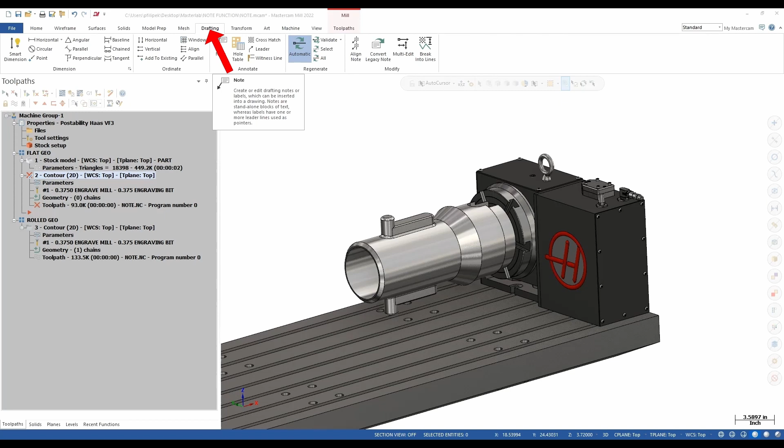Up in the drafting menu in Mastercam we have the note option. If I go into the note option, I have the ability to type in whatever I want here for letters. In this case I'm just going to type in part number 1. This works just like our wireframe create letters option, with the same sort of clicks.

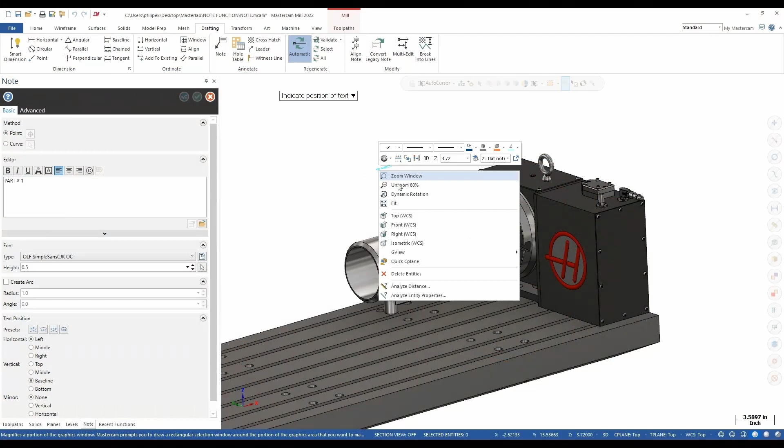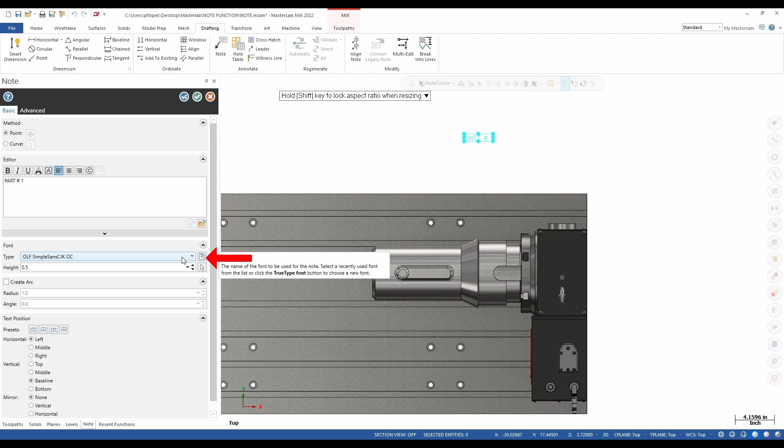If I go ahead and just put part 1 out into space, this will give me the ability to make it easy to select later down the road. In our note dialog box we have a bunch of options as far as bolding, italics, underlines, and a lot of different font sizes that you're used to. You can change the height to whatever height you want the letters to be, and you do have presets at the bottom as far as horizontal, vertical, or mirror.

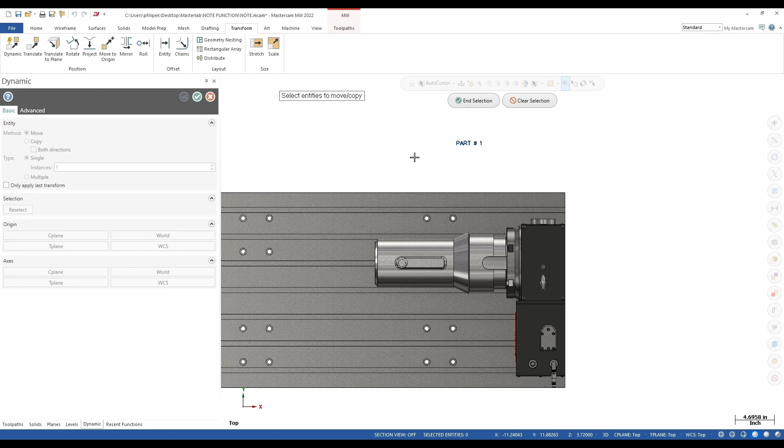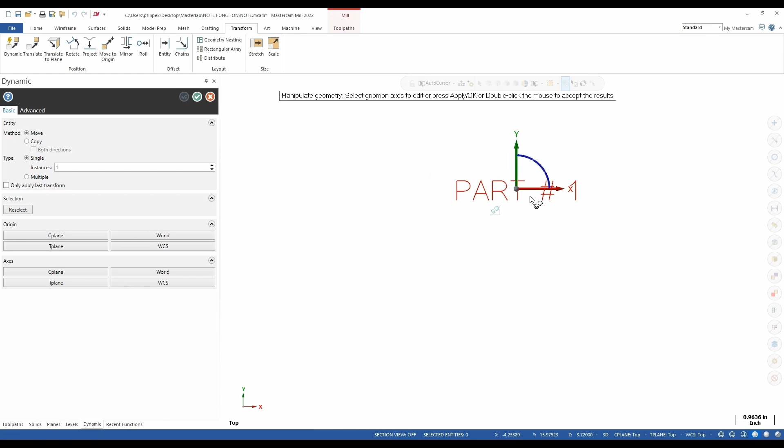So I placed my letters out into space here, and I'm going to go ahead and green check. I'm now going to use our transform dynamic option that we're all used to. I'm going to go ahead and window my whole note and end selection. One nice thing that we did keep here is we do have our blue and white temporary midpoint that we can use inside of Mastercam. So I'm going to go ahead and anchor up on the blue and white dot on my note and anchor it there.

I can now drag this to my position on my part, and now I can use quick points to align this to the center of my feature. I'm going to go ahead and green check there. Now my letters are placed on the part.

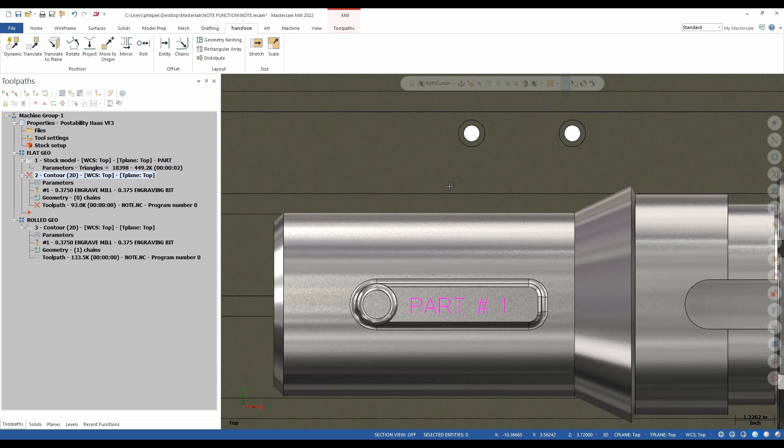Now I can just go ahead and do a simple contour toolpath to engrave this. I have one pre-built here without any geometry, so let's add some geometry. The chaining method for this note is going to be a little different than we're probably used to. You're not going to window this. It's a note, so it's all considered as one feature. So I'm just going to go to my wireframe menu and have full chain on.

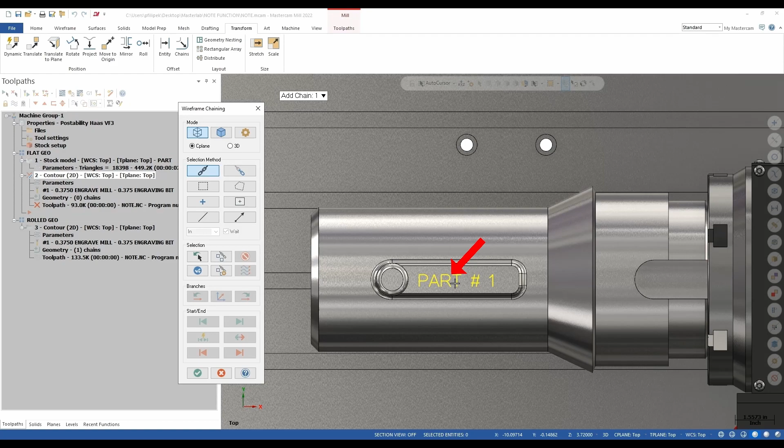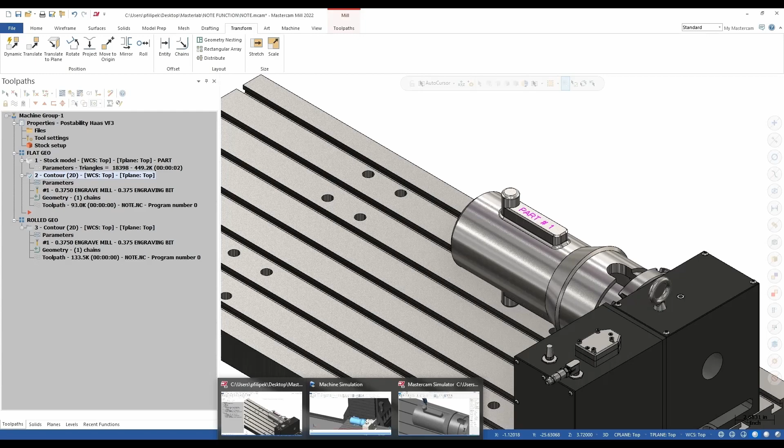As soon as I hover over the note that I have on my part, you'll see that the whole thing highlights. All I need to do at this point is left click on it. I'm going to green check out of my selection, green check out of my add chain, and regenerate this. Now what we have here is a toolpath to engrave part 1 onto the part. So if I go ahead and take a look at this and verify, we're going to see this engraved as we would expect.

Now the nice thing about note is we can go and edit this on the fly. So if you have a family of parts that have different part numbers, here's where it's really going to pay dividends to use the note function.

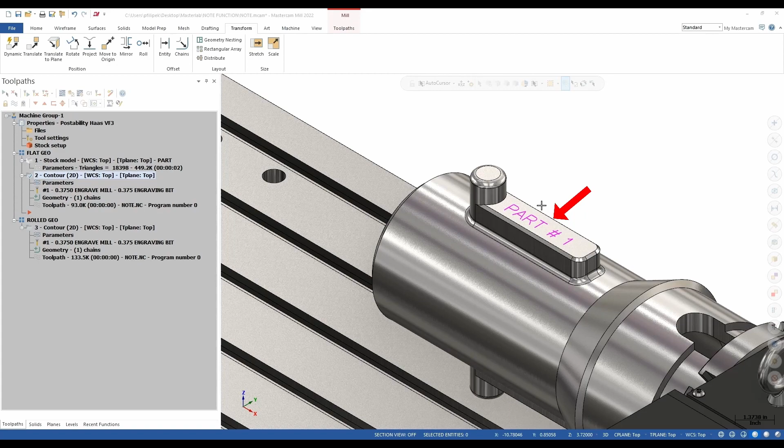So I'm going to go back to my note, and once I hover over it you'll see that it highlights yellow. If I left click on it and go back up to the drafting menu to note, you'll see that it fills in what I wrote before - in this case it's part number 1. I can go back here and type in this is going to be part number 5.

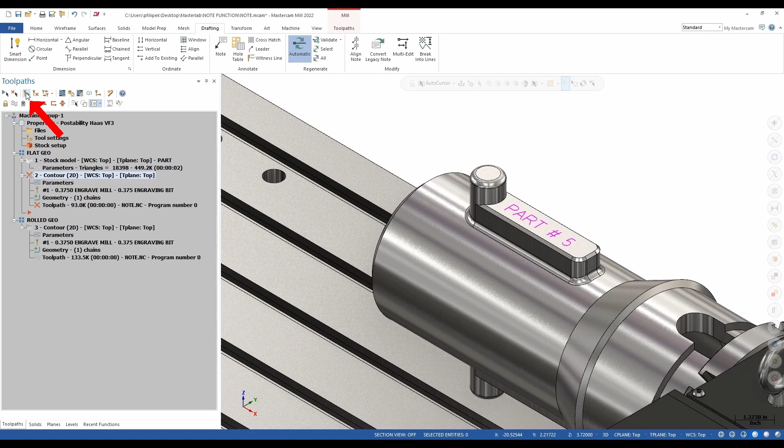I can simply green check and regenerate, and now my engrave toolpath is going to engrave part number 5 instead of part number 1. So as you can see, very handy to use for editing of text. We didn't have the ability to do this previously, and now we do.

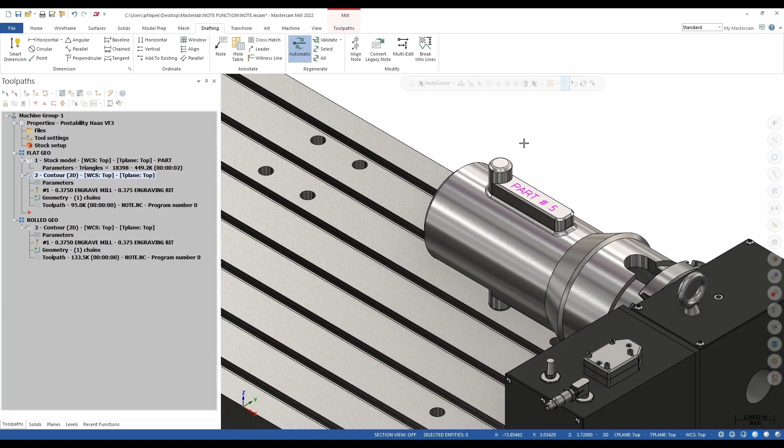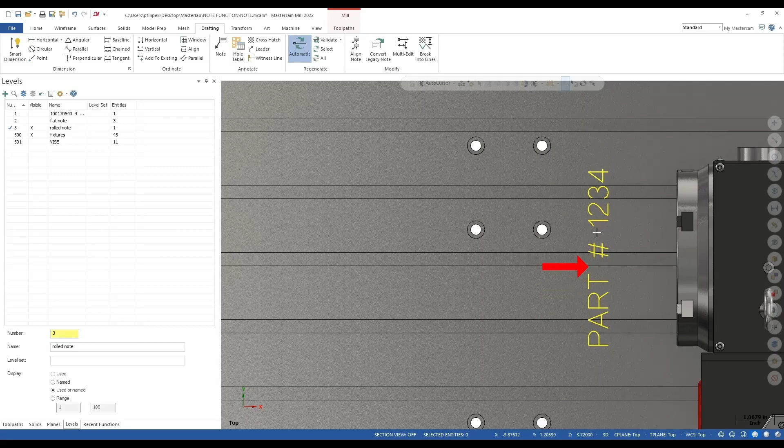One other situation we can get into here is maybe I want to cut this on the round of the part. One rule to this is we're not going to be able to roll a note - it's going to have to be flat. So if I turn off some of my levels here, you'll see that I have some of this prepped out for us. Here I have part number 1, 2, 3, 4 written in note form, so I can always go back and edit this, and it's laying at the center of rotary.

If I go back to my toolpaths here, I do have a toolpath already built, and this is the same situation here - I picked a note, as we can see that it's picked through there. And I went ahead in my parameters and used my rotary axis controls, axis substitution, and rolled it on the part at a huge diameter of 6.8 inches.

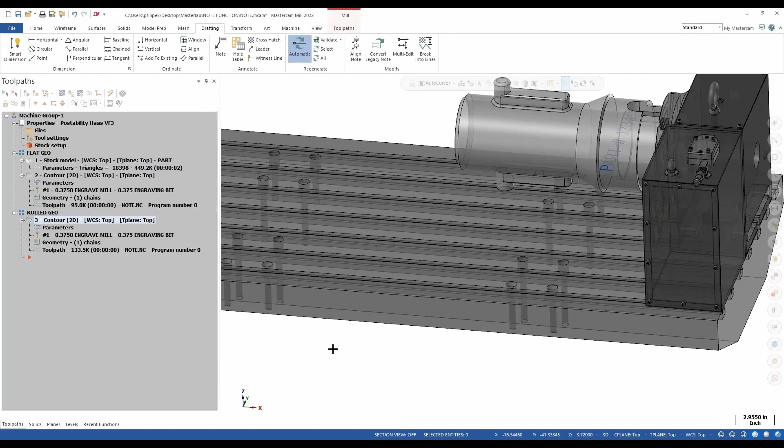If we go ahead and look at this in machine simulation, now you'll see that this is being engraved onto our part in full machine simulation. And I would also have the ability to go back and edit this note at any time, and it would update on the round of that part without going and reconstructing anything.

I certainly hope you can take this little example I gave you of editing a note and using it for engraving in Mastercam. It's very handy, especially for different part numbers. For the ability not to have to go back and recreate the wheel, now we can just go edit what we already have on the fly very simply.